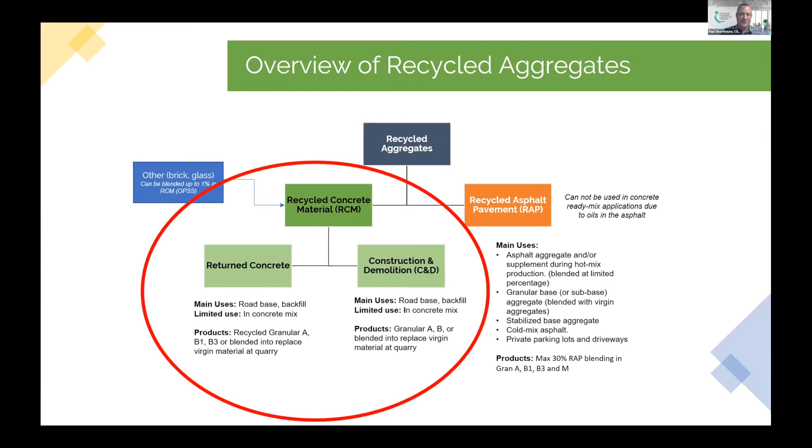When we think about road construction, it's really important to consider the various layers and how much recycled aggregate materials can be incorporated into those layers. In particular, the base and sub-base layers is where we're at for the discussion today. The question we'd really like to pose is, can today's standards and specifications potentially go further and incorporate greater amounts of recycled concrete materials than what's being allowed today? We'll dig into that a bit through the discussions.

So what are the benefits for adopting greater use of recycled concrete material, and why should we care? I think three main areas: availability, cost, and environmental. With respect to availability, we're seeing growing demand for recycling and recovering valuable resources instead of landfilling them. Recycled concrete can be readily available based on construction demolition activities in urban centers or other locations. Secondly, around cost, the opportunity exists to get supplies of recycled concrete at lower cost than virgin sources, given shorter transportation in more urban centers. But of course, this varies a little by location or supply.

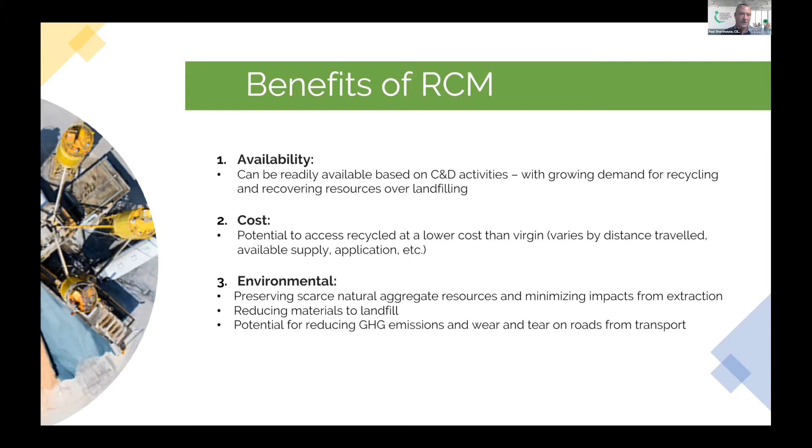And thirdly, the environmental benefits: preserving natural aggregate supplies and reducing impacts from virgin resource extraction, reducing the materials going to landfill, and potentially reducing greenhouse gas emissions based on shorter transportation and processing considerations.

So challenges and risks. It's good to keep in mind the factors that must be front of mind as we think about how to maximize the amount of recycled concrete in use. First of all, quality and consistency: contamination and deleterious materials can create environmental or performance related challenges. On the performance side, over time, strength when using older recycled concrete aggregates on projects could be an issue, and durability over a longer period is an important consideration, with factors like freeze-thaw resistance or drying and wet cycles over time.

Availability and cost, which I touched on as a benefit, can also be a challenge to manage. The availability and the distance traveled affect cost. Recycled materials may not be available in less urban centers, so there's a geographic consideration there. And the prescriptive nature of standards is also something to consider—prescriptive specifications can create issues with maximizing use, which we'll hear more about today from Joanne. Really, the alternative is more outcome or performance-based standards.

There's also a lack of consistent approaches. The lack of harmonized approaches across local governments or across regions can make it challenging for industry to invest in infrastructure and provide consistent supply when demand is somewhat unreliable. And lastly, the perceived risk or business-as-usual mentality is something to think about—a lack of familiarity with using or specifying recycled aggregate in projects, or a previously negative experience, might keep people from wanting to use it in the future. So it's those behavioral shifts to think about as we look at maximizing opportunities for recycled aggregate use.

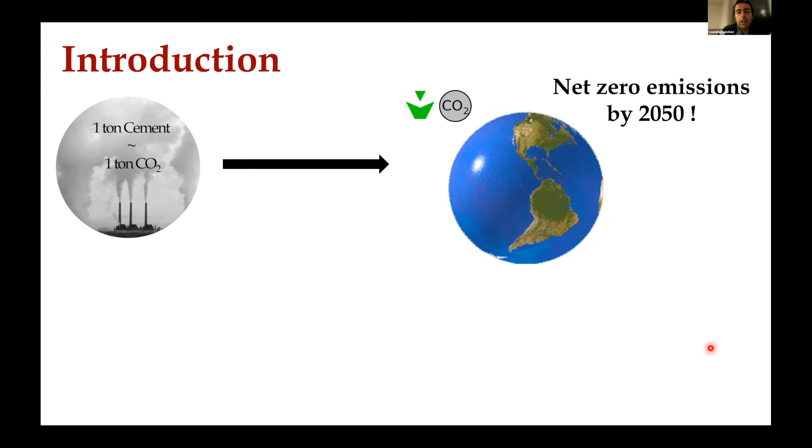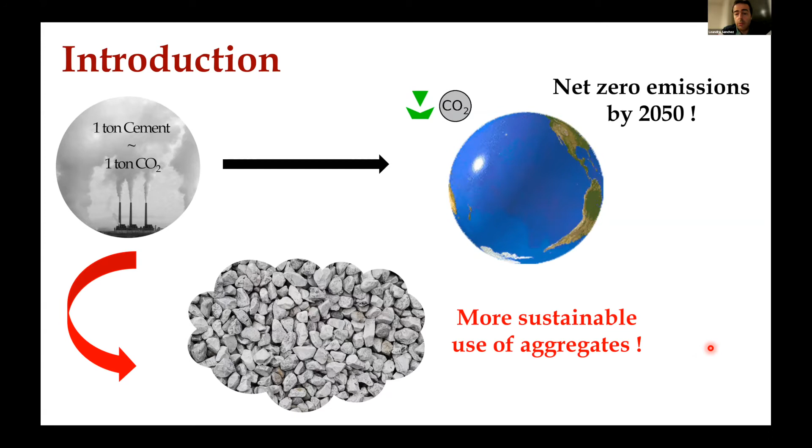Everybody knows that we need to decrease the carbon footprint of construction. Quick background: in the cement and concrete industry, which is where I work the most, one of the techniques to try to decrease cement use, we have a target of net zero emissions by 2050. So we need to accommodate our work to be more sustainable. One way of doing that is through the use of more sustainable aggregates, and that often means the use of recycled concrete aggregates.

The use of recycled concrete aggregates, as Paul mentioned, may reduce the use of virgin aggregate, which is probably a less pressing issue in Canada compared to here in Europe. But over time, we see more and more of our natural aggregates being depleted. Also, the use of recycled concrete aggregates could reduce the impact of aggregate transportation as well.

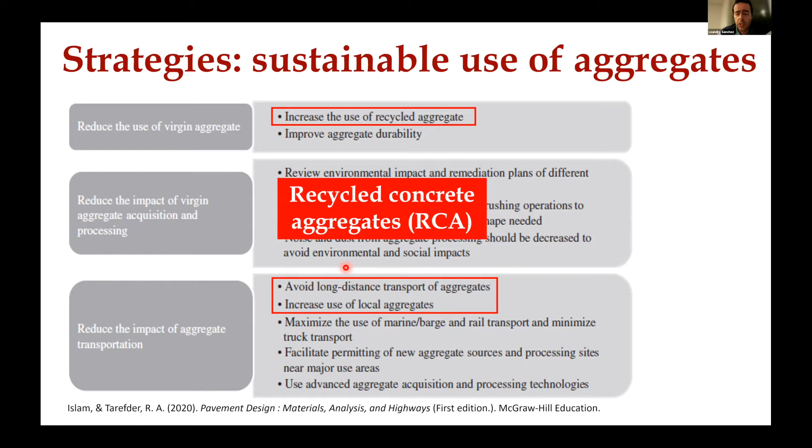So it's very important for us to start acknowledging and studying deeper the features of this material, to be able to use it in different applications in construction. Paul already mentioned a little bit about it, so I'm going to go very fast.

Whenever we talk about recycled concrete aggregates, we cannot think that all RCA is the same kind of animal. We have majoritarily two types: the so-called construction demolition waste, and return concrete. Construction demolition waste is much more heterogeneous, we may have different materials embedded such as ceramics, plastic, and things like that. Whereas return concrete is pretty much pure concrete that for some reason does not meet criteria in the field and returns to the concrete unit to be further crushed and reused.

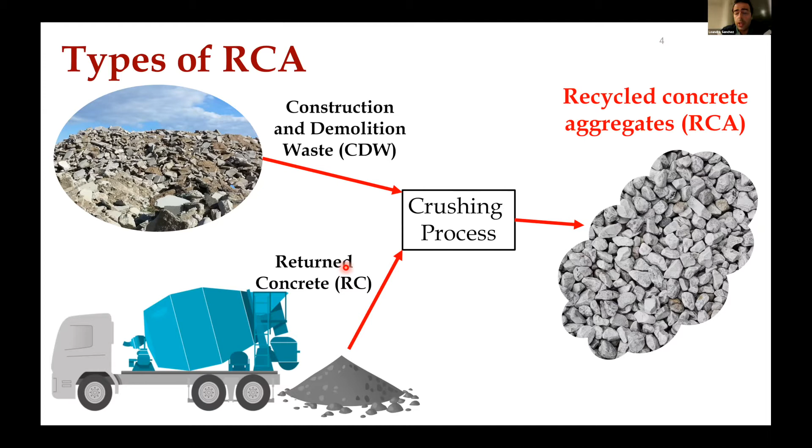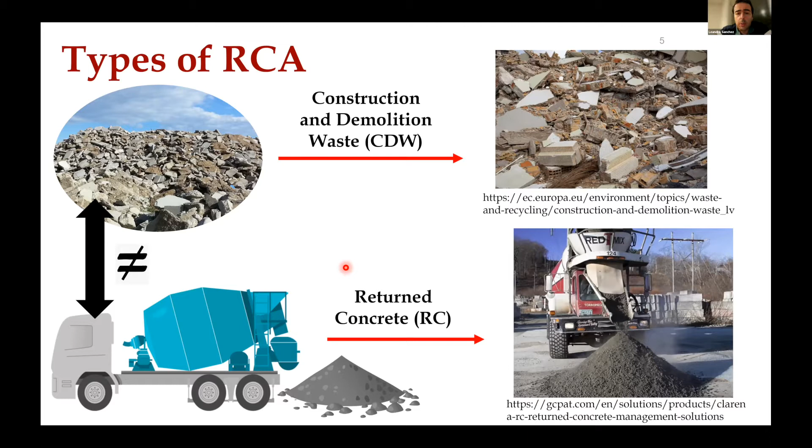But they are very different from one another, and we need to understand the features of these two materials in order to apply them in the field. So if we look a little bit at what our neighbors are doing in the US...

65% of RCA is pretty much used as aggregate in base and sub-base of roads, and only 6.5% is used in new concrete.

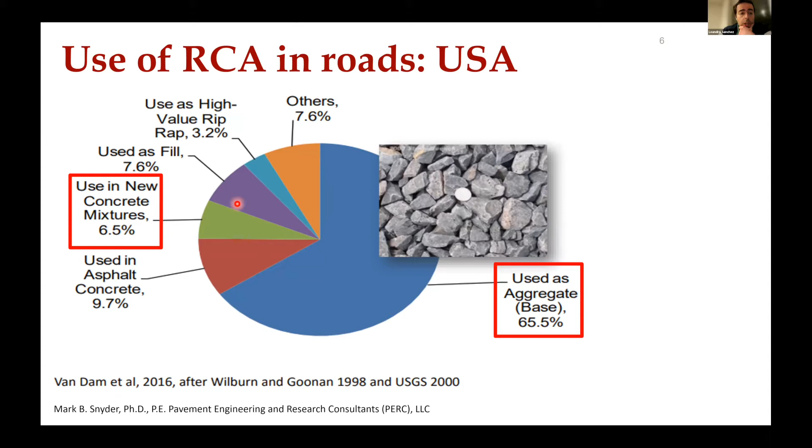If we look at the Canadian perspective, and I'm going to go very quickly here because we'll have other colleagues addressing this part much better than I do, RCA is currently used for roads, but not that much, I would say. We can improve it quite a lot.

30 to 50% of asphalt debris are allowed in new base materials. For construction demolition waste, we always need to check the potential for materials within that CDW that may harm the concrete or asphalt, so that they might be rejected.

But what I would say is the most important feature that should be understood, so that we use this material with an interesting engineering perspective, is the unique microstructure of RCA.

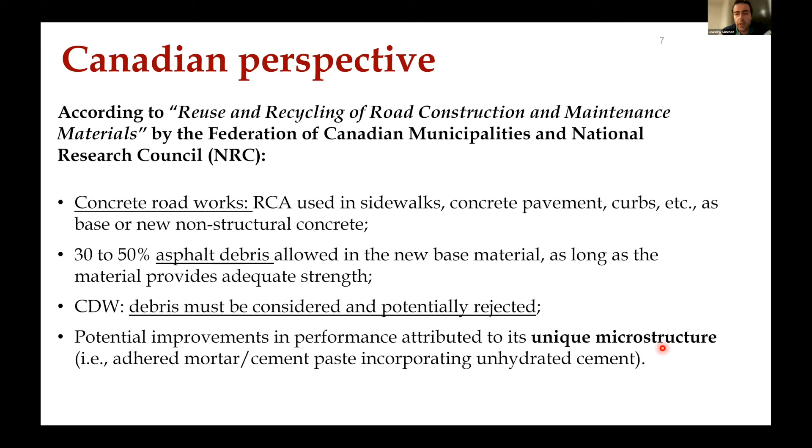If we do a quick look at the microstructure of RCA, you're going to see that we don't simply have an original virgin aggregate. We have a composition of original virgin aggregate and adherent cement paste or mortar, depending on whether it's a coarse or fine aggregate.

If you look at this figure, you may see that all the particles highlighted in red on the left and in yellow on the right - I would say that at least 30 to 50% of those particles are not composed of aggregate. They are actually cement paste or mortar.

And this should be accounted for, because if it's not accounted for, either in the testing of the aggregate itself or in its usage in a new mixture, in a concrete mixture for example, we are going to have issues. So I'm going to show, especially in my case because my research is in this area, the usage of this material in concrete.

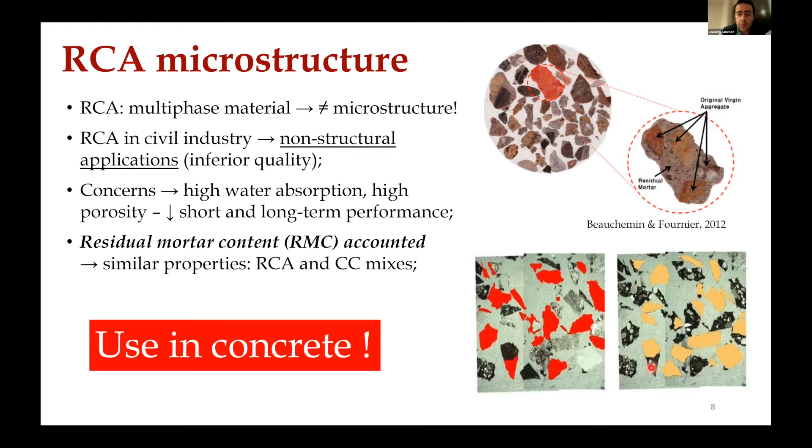So normally what people do is replace aggregates in concrete using a mix design called the direct replacement method, or DRM. They replace conventional or natural aggregates with recycled concrete aggregate, either in mass or volume.

What is the problem with that? If you compare a companion conventional concrete designed with natural aggregates to a recycled concrete, either coarse or fine recycled concrete aggregate, you'll find the recycled mix has much less aggregate and a much higher amount of cement paste, because we're not accounting for the adhered mortar or cement paste. With these mismatched volumes, we normally end up with lower performance.

If you go through papers, reports, and past experience, you'll see that many people qualify recycled concrete aggregates as an inferior material compared to natural aggregates. But I've been discussing this with a colleague of mine from the National Research Council, Dr. Reza Fatifazo, and he has a nice way of putting it. He says, well, it has been good at some point because it has been used, and now it's no longer good, right? So what we probably need is to find a way of better using this material.

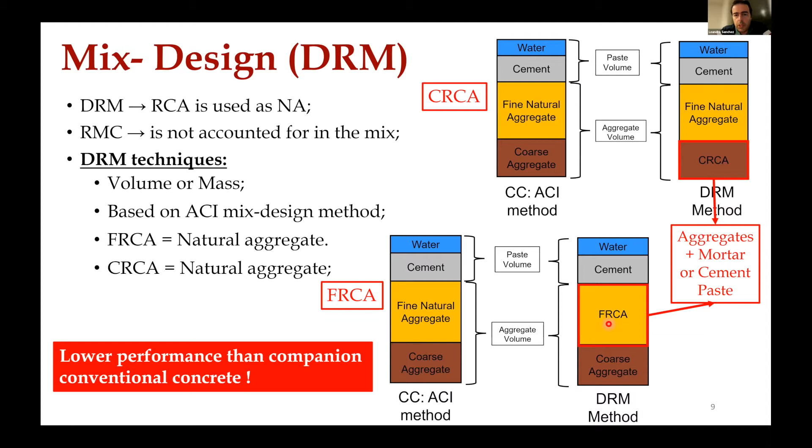Following the work developed at NRC in the early 2000s, a new method of mix proportioning, the equivalent mortar volume method, was developed. At the University of Ottawa, I'd say we upgraded this method with the help of NRC colleagues to develop concrete mixtures with a better fresh state using 100% recycled concrete aggregate.

Following that idea, we measured the residual mortar or residual cement paste in either coarse or fine aggregate particles, and we factored that into the new mix proportioning of the recycled concrete. So we essentially matched the volumes of the recycled mix, in terms of cement paste and aggregate amount, to the conventional mix.

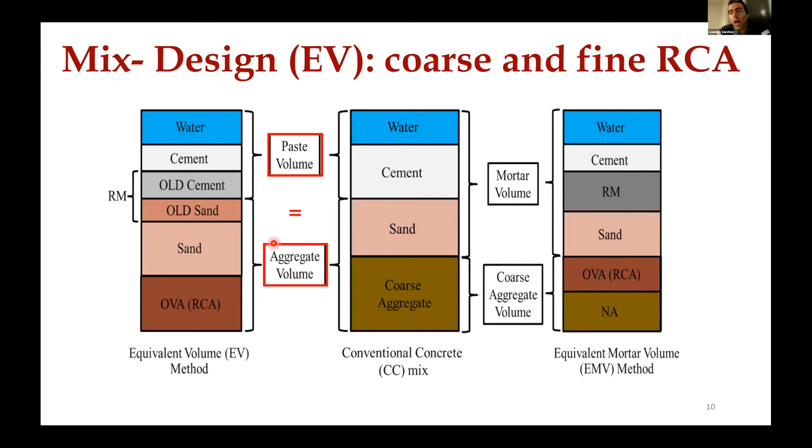I'd like to share a couple of results from this research. First, we were very interested in studying the influence of the source and quality of aggregate on the performance of recycled concrete mixtures. So we used two different types of aggregate: a stiff aggregate, quartzite, compared to a non-stiff aggregate, limestone.

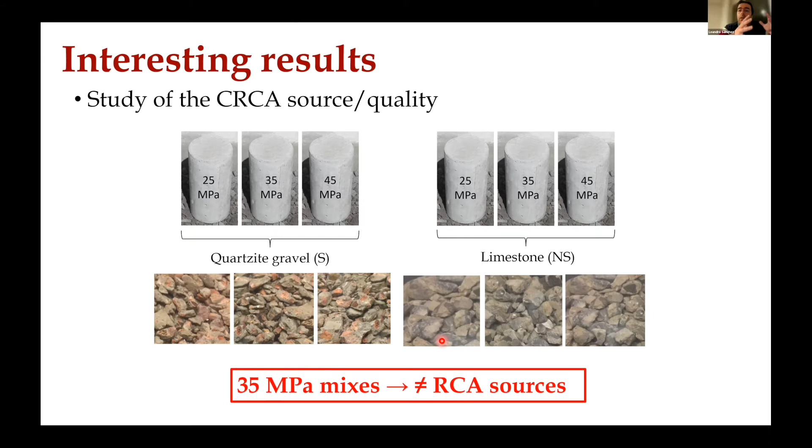We fabricated conventional concrete at 25, 35, and 45 megapascals made of these two aggregates, moist cured the materials for 28 days, and then crushed all of them. This gave us six different types of recycled concrete aggregates. We then used the EMV method, developed in collaboration with NRC, to proportion 35 megapascal concrete made with these different inner qualities of RCA.

The first thing we did was measure the residual mortar adhered to the particles. It's very interesting to see that the higher the strength of the material, the higher the residual mortar attached, especially in the case of the limestone. The values were very high, ranging from about 34-35% up to 52%. So imagine that a third to half of the particle is not composed of natural aggregate at all -- physically, the material is completely different and should be treated differently.

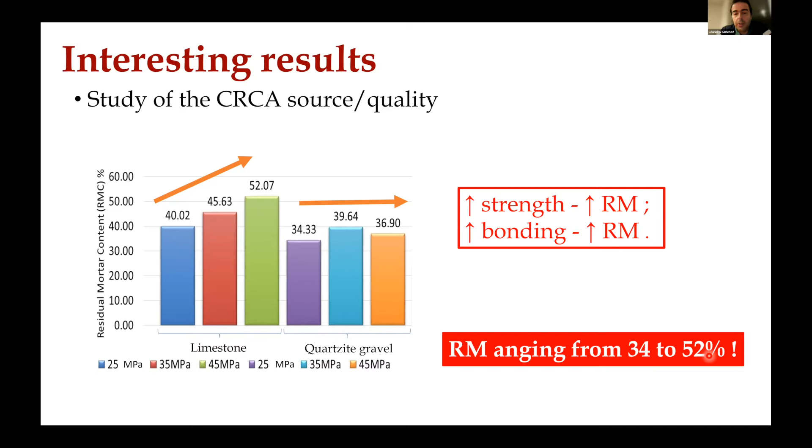Using the new mix proportioning technique we proposed, whatever the inner quality of the material received, as long as we matched the volumes of aggregate and cement paste, we were able to proportion concrete mixtures with compressive strengths above and beyond the 35 megapascal target set at the beginning of the project.

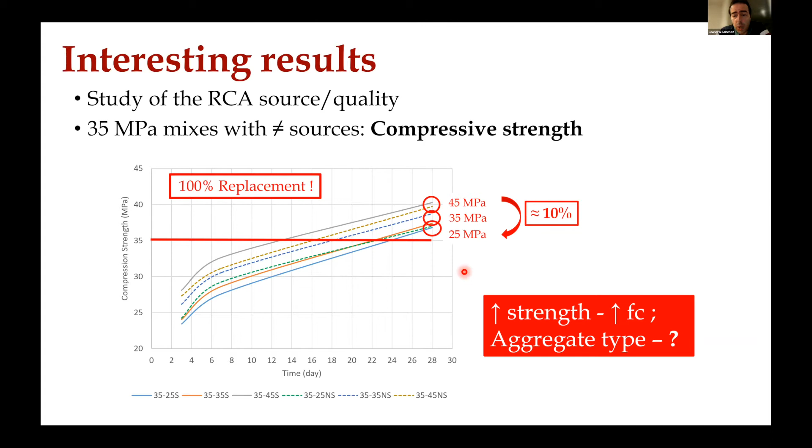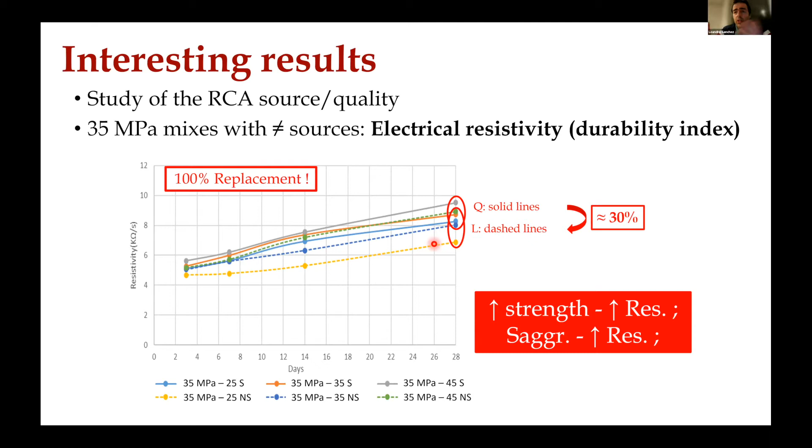We were also trying to understand a bit more about durability. I currently have a large project on this with a PhD student, but in this quick project, we tested electrical resistivity on those mixtures and verified that they yielded quite good results compared to conventional concrete. So it was very promising, using mixtures designed with matching volumes to the companion conventional concrete.

A more scientific approach is called the particle packing model. The green curves demonstrate the matching volumetric approach as previously mentioned, whereas the dark curves demonstrate the direct replacement, and the blue ones the particle packing—or actually vice versa, the green ones the particle packing and the blue ones the EV.

We tested freeze-thaw resistance of those, performed at NRC. If we compare that, we can see that with the same inner quality of the RCA we received, as long as you mix proportion your concrete properly, you're going to have proper performance—a residual dynamic modulus higher than 60% compared to the initial state, so the loss is lower than 40%. However, if you simply directly replace that in concrete, your material is going to fail over time, because you're not accounting for the higher porosity, higher absorption, and different microstructure of the particles.

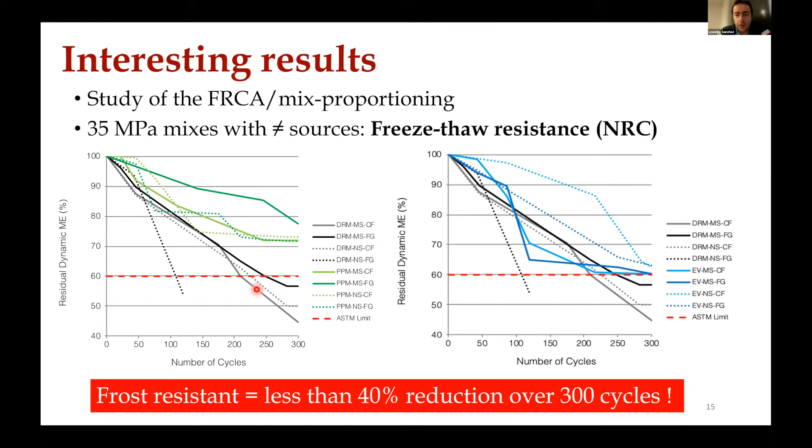I'd like to finish by saying that I've been working at EMPA here in Switzerland, sharing experiences in the usage of RCA. They use much more RCA than we do in North America. If they use up to 25% of RCA in concrete mixes, they don't even consider it a recycled mix—they consider it conventional concrete. In Zurich, for example, people are almost obliged to incorporate recycled concrete aggregate; they can do up to 50% for even structural applications. So I think it's a matter of time before we need to do that more and more worldwide, and I think the opportunities are there.

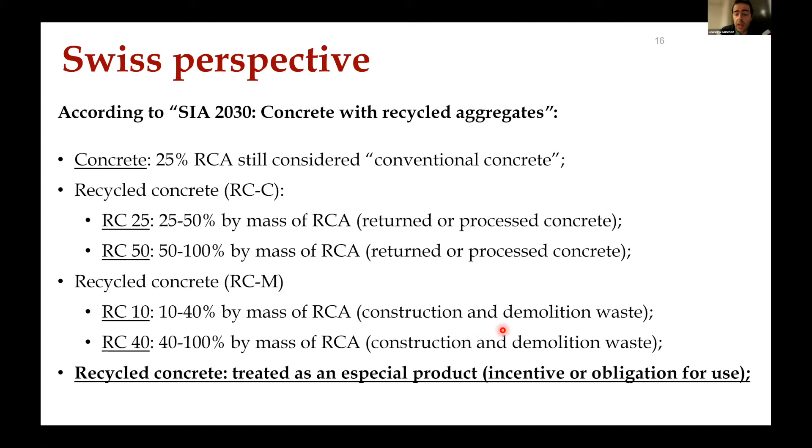One of the things they are doing a lot here as well is carbonating the aggregates to enhance performance, and the results are very promising too. Nevertheless, this is something they're doing with both returned concrete and construction demolition waste.

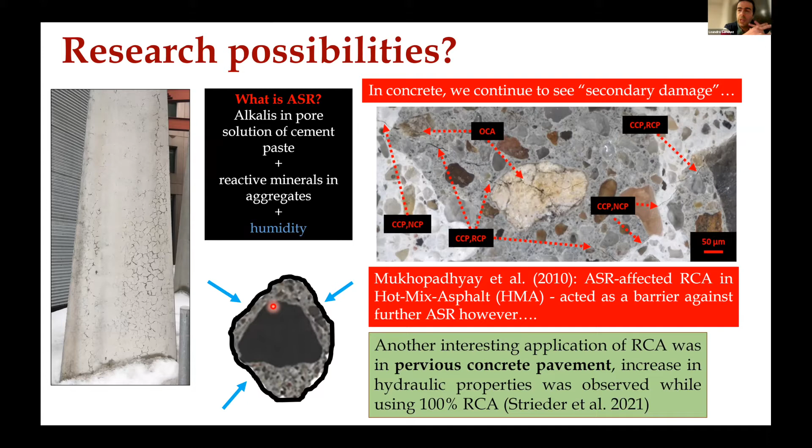Finally, I recently discussed with a colleague from ACI—this researcher, since most of my research is with the use of RCA in concrete—and for roads, people may think most of our roads are made of asphalt, so how can we transition that use not necessarily on the base and sub-base? This colleague used recycled concrete aggregate from previously deteriorated RCA. In Canada, we have lots of deterioration due to alkali-silica or alkali-aggregate reaction, and this aggregate, normally no longer used in concrete because of a potential deleterious secondary reaction, had been used in hot mix asphalt. Apparently, whenever used in hot mix asphalt, it yielded very good results, and further deterioration has not been observed. So this might be a potential hot topic for further study in the future with the use of previously deteriorated recycled material in new asphalt. That's pretty much my presentation.

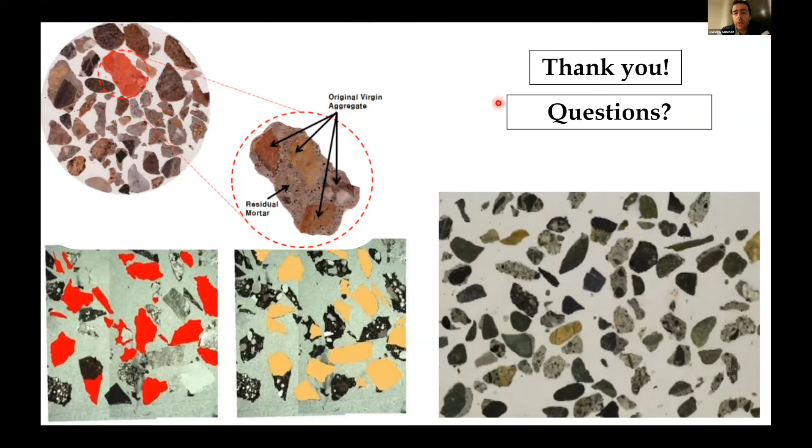That's great, thank you Leandro, for the overview and for getting into some of the technical considerations that I'm sure our engineering audience will appreciate. A couple of comments and questions came into the chat box so far—a question from Rob about how to define lower performance. You mentioned that earlier in your presentation, Leandro. Do you have any perspective to share on the scale of performance?

Sure. Normally the first thing people think about is strength, but strength is no longer a big deal for RCA—we can get whatever strength we want. However, if you don't match the ingredients volumetrically, as I mentioned before, you need to use lots of cement to achieve the workability and strength required for most projects, which makes no sense with the use of RCA, because we're trying to decrease the carbon footprint, not increase the amount of cement. So the short answer is that civil engineers normally think first about strength, but when you're able to match volumetrically, we can enhance performance beyond strength to include nice workability and much better durability—meaning freeze-thaw performance and performance against different durability mechanisms.

Thank you everybody. The title of the presentation is, as you can see, towards sustainable construction industry, as part of the stakeholder workshop. My name has been mentioned, Omran Maadani, and my colleagues Mohammed and Juan are joining me as well. Second slide, Mohammed, I guess.

Canada is currently using aggregate faster than it is being made available, resulting in an aggregate shortage. There is a critical shortage of natural aggregate and an increasing amount of demolished concrete - concrete accounted for almost 150 million tons every year as waste. The current usage of aggregate is not sustainable, and as demonstrated by the growing shortage of natural aggregate in urban roads, recycling concrete from deteriorated concrete structures would reduce the negative impact on the environment and increase sustainability of aggregate resources.

There are several barriers to overcome in order for RCA to become widely accepted. Initially, there is a high investment in the cost of purchasing concrete crushers, in addition to maintaining those crushers. So there are still many unanswered questions regarding the RCA characteristics and durability, and long-term performance on the beneficial use of RCA and RAB in concrete and pavements respectively.

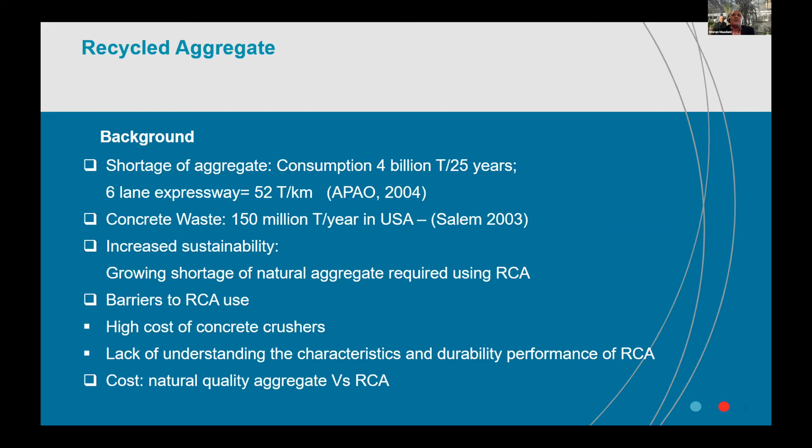Construction and demolishing waste makes up a large portion of all generated solid waste, such as RCA and RAP.

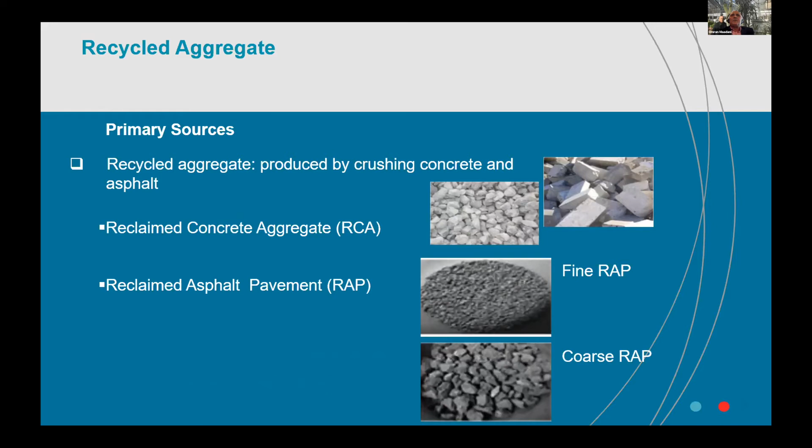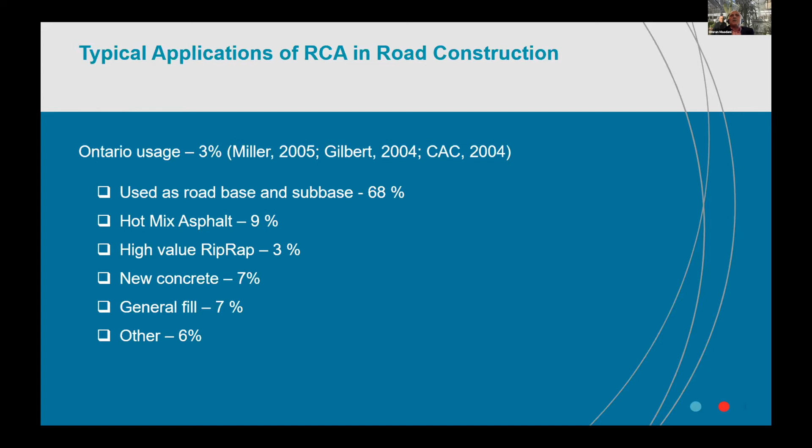RCA can be used in concrete. There is a CSA and standard ACI mix design procedures to control the fresh and hardened properties. In the same way, RCA is used in HMA according to OPSS 1003, and unbound materials according to OPSS 1010, to evaluate different properties.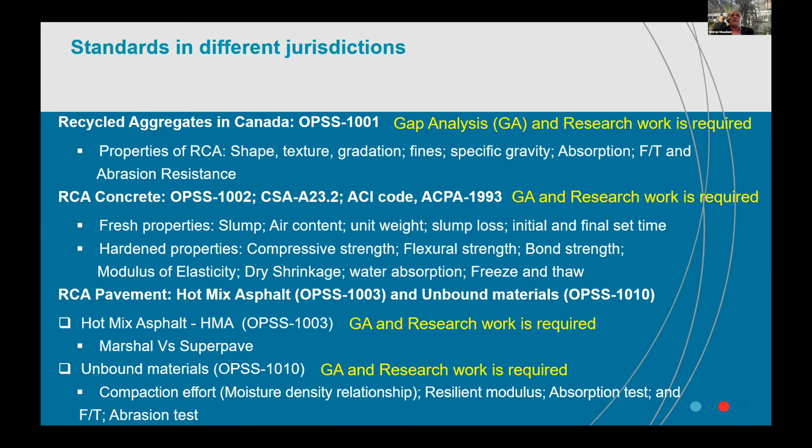Same things here, optimization of concrete mixtures. We need to do some gap analysis and research work to extend the limitations set by some standards.

Both CSA and ACPA allow use of RCA as long as the resulting product meets its performance standards. Both CSA and ACPA criteria were used as guidelines for optimizing the concrete mixture to improve both fresh and hardened concrete properties.

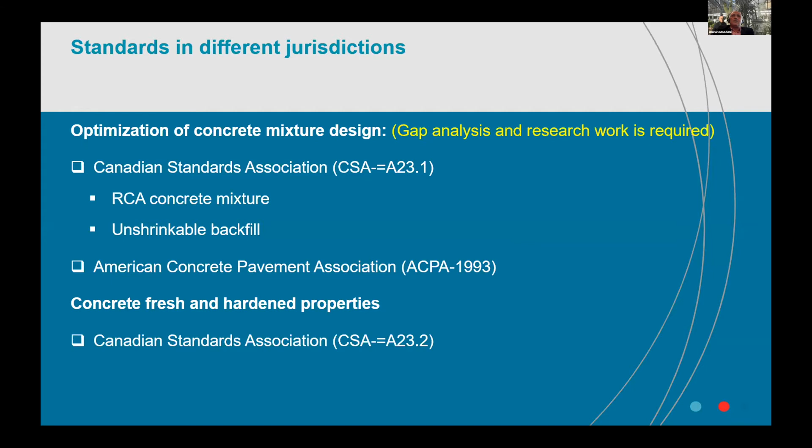First, using RCA in concrete, the Canadian Standards Association addresses RCA very loosely due to ambiguous characterizations of the product in the national, provincial, and municipal material standards and building codes, all imposing severe restrictions on using RCA. For instance, 75% of all concrete used globally is non-structural, which begs the question, why are we using structural grade aggregates to produce non-structural concrete? I believe research work is needed to support these changes.

Also, OPSS indicates some limitations using RCA and RAP in some materials. For instance, granular material O and granular material 2 have some limitations that can be increased with doing some research work.

Also, one of the performance parameters is the Los Angeles abrasion test, and there are limitations there. This can be better evaluated to see how we can increase the limitations with having good quality RCA being adopted and used in concrete or roads.

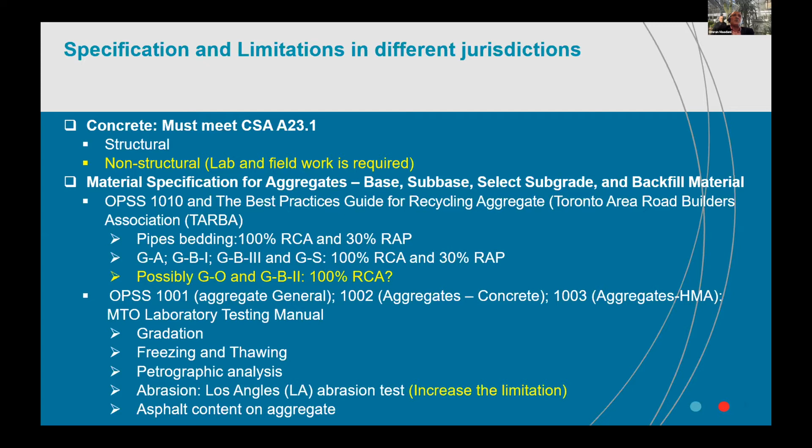There are some practices being used now. For instance, the best practice guide for recycling aggregate for the Greater Toronto area roughly explains whatever is mentioned in OPSS 1010, covering quality control, production, environmental compliance, and safety issues.

The Ontario Good Roads Association will unveil the reclaimed asphalt best practice guide in spring 2022, with more explanations on how to stockpile RAP, prevent contamination, and manage stockpiling and processing operations.

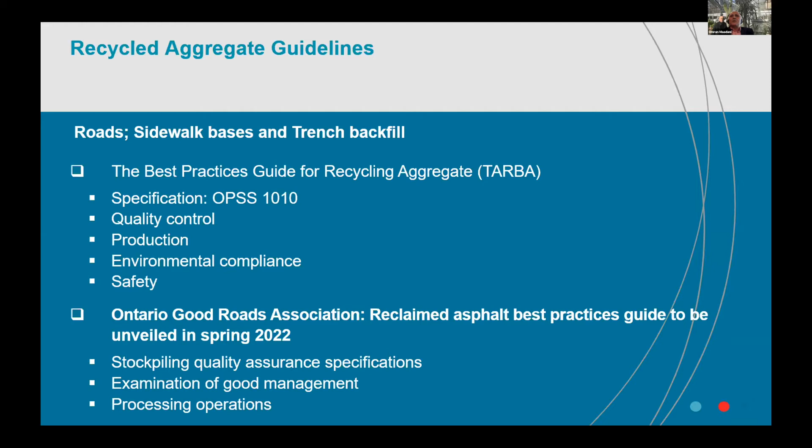In the next few slides, I'll talk about some of the needs for future research. I also thank Leonardo for discussing his ongoing collaboration with NRC on recycled concrete.

I'll start with some highlights from Infra Guide 11, published in 2005 in collaboration between NRC and the Federation of Canadian Municipalities. I know most of you are already familiar with this. So, some of the lessons learned from this guideline.

This mentions that use of RAP as a granular base reduces the amount of new granular material required for road construction. However, the value of the asphalt cement in the RAP, which is the binding agent, and the energy invested to produce this, may not be fully exploited if that RAP is only used within the base layer.

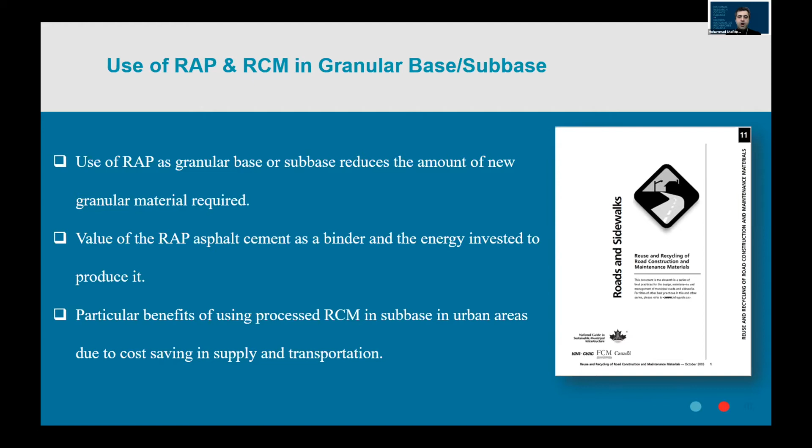However, there are some circumstances that really dictate only using the RAP in the base layer, which we all agree on. Also, there are particular benefits according to this guideline for using processed RCM in subbase, especially in urban areas, because of the cost saving and economic aspects, due to reducing the cost for transportation and supply.

Also, some of the highlights from the NCHRP report 598, which was sponsored by the National Cooperative Highway Research Program in the US, indicated that there are some concerns in unbound layers. They also highlighted some constructability concerns and the validity of the standard tests, which we also discussed during the Q&A session of the previous presentation.

Some of these issues can also be related to properties of the aged asphalt binder, presence of contaminants like soil and mud, which are not usually found in virgin aggregates but are somehow common in recycled aggregates. Also, these materials have been exposed for a long time to different environmental elements such as aging and climatic factors.

As a suggestion from NCHRP report 598, using accelerated pavement testing or in-service testing of pavements is considered two potential research approaches that can help evaluate the potential of these materials, evaluate pavement designs based on these materials, and other performance-related features, which was also brought up during the Q&A a few minutes ago regarding how performance can be measured.

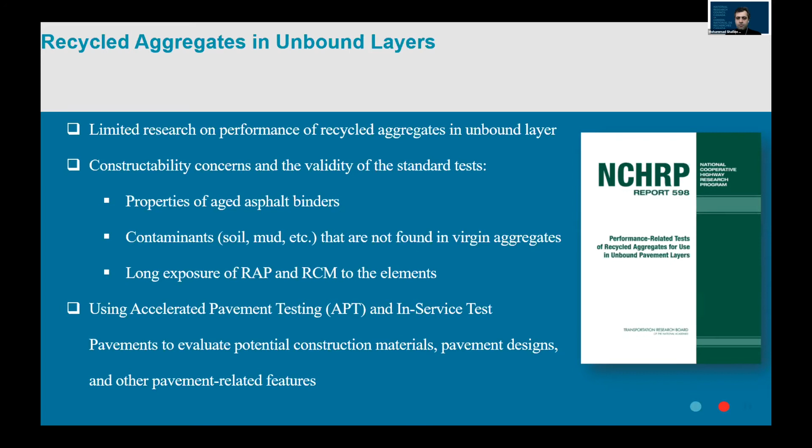If we talk about these two technologies, one being accelerated pavement testing, here you can see the top picture, which is a circular test track in France, and another type of accelerated pavement testing using heavy vehicle simulators, HVS. This one is from the Federal Aviation Administration, again in the US.

Using accelerated testing can provide us with a quick evaluation of both flexible and rigid pavements built with unbound recycled aggregate layers. These technologies can also provide us with the effect of multiple control factors, such as using a specific type of aggregate with specific properties, and how the performance of these unbound layers can be measured with proper visual observation or instrumentation. There are some shortcomings of APT, which probably is known to everyone.

It's the long-term evaluation, because the long-term impacts of freeze and thaw during multiple years, the strength loss associated with these long-term impacts may not be fully investigated using APT technologies.

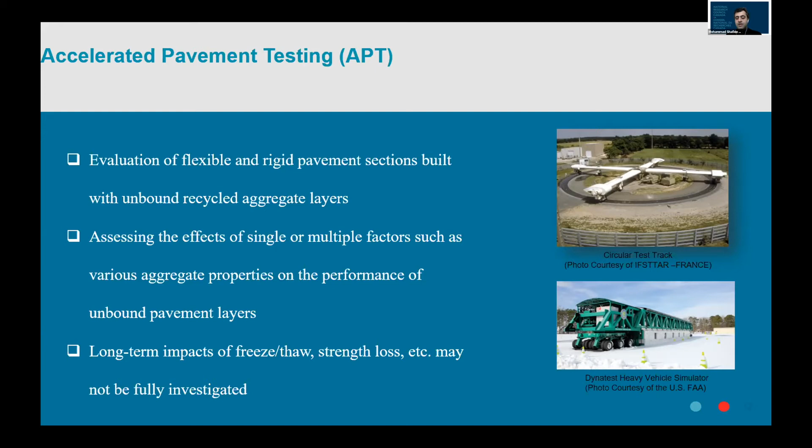However, we all know the value of in-service test pavements. These are full-scale real projects, which are most of the time instrumented with strain gauges, soil compression gauges, earth pressure cells, as well as environmental sensors such as time domain reflectometers, moisture sensors, temperature probes, settlement plates, and so on and so forth.

With this in-service pavement testing, researchers and practitioners can evaluate the actual performance of roads built with recycled aggregates. Especially if you have multiple test sites across the country, we can evaluate how climatic variation can impact the performance of these recycled layers.

Construction procedures can also be simulated in this way, and that's good for contractors' experience, and also for updating the construction standards and specifications especially.

As I mentioned earlier, instrumentation can be a key tool to give us exact in situ results of how these layers are performing against traffic loads and environmental variation, so that we can have a mechanistic design of pavements using the results of stress, strain, and deformation measured from these gauges.

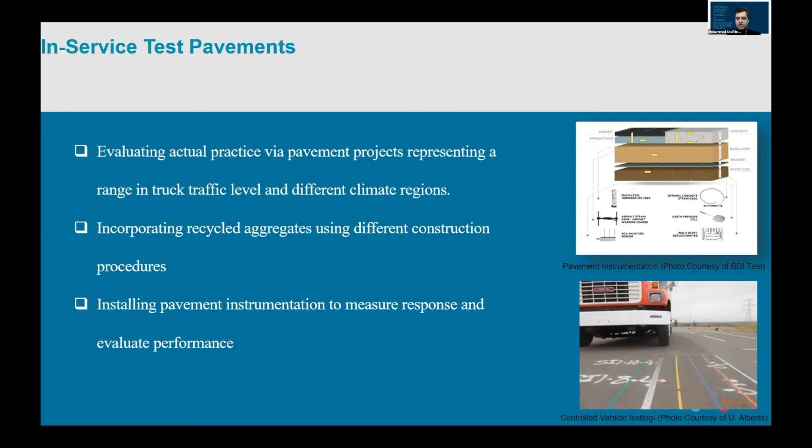Recycled RCA is a readily available, flexible, and sustainable product that has a proven track record as a high-performance material for base, sub-base, and other construction projects. It is also a viable substitute for virgin aggregate and concrete for an increasing number of applications.

We are committed to increasing the use of recycled aggregates by continuously reviewing policies, benchmarking with other municipalities, and conducting research to identify best practices. This ensures that we are upholding and executing environmentally friendly practices.

As Mohammed said, instrumentation will be one part of the work, and that is proven by the literature review, which provides a view of sustainability and key performance indicators. The material properties of RCA and RAP, both as aggregate and in concrete mixtures, HMA, proportioning design with RCA, performance of existing RCA pavements, and implementation of RCA, highlight that RCA has been used successfully and more work needs to be done.

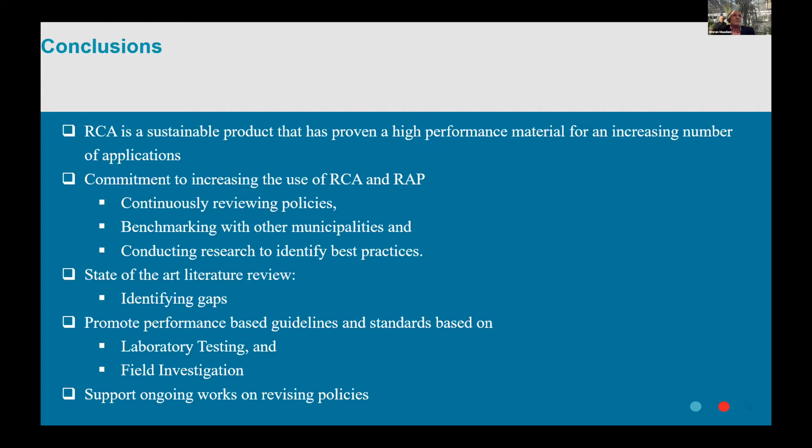Thank you, Mohammed. Thank you, Omran, for providing that overview and sharing the slides around standards, practice, and testing considerations. Had some good questions come in through the chat box. Jo-Anne, do you want to? Yeah, I can help you again navigate some of these.

So this one appears to have come through from someone named Marion, but we know we have several Marions that have come through on that name. It's a simple question, and I think this is kind of the heart of what we're getting into in the latter part of today's workshop, which is the certifications and standardization of this practice. So the simple question is: is there a certification right now for the use of RCA? So if our team at NRC - I know there is some sort of provincial standards that you spoke to very directly in your PowerPoints - but are you seeing any certifications where that's concerned, third party or otherwise?

We at NRC here, we do research work. So we don't certify anything here. We can help, as you said, the industry, how to do things and what can be done, and what is the percentage of RCA, what are the properties that you are expecting if you use this kind of RCA versus virgin aggregate. And yes, we can improve the fresh properties, the hardened properties, but to issue a certificate, no, we at NRC are not allowed to do this.

Excellent. So I'm going to take the conversation in a bit of a left turn, and I'm very mindful that we've got a lot of engineers and engineering minds in the workshop today. We're very grateful for the technical discussion we've had thus far, and it's absolutely needed. But where I'm trying to take you in this presentation is the intersection with what currently seems to be sporadic or inconsistent use of recycled aggregate thus far, and entertain this idea of, can we start to standardize it and maybe even certify it, as was suggested in one of the questions today? And then how do we intersect that with more broadly, more sustained and systemic use in public procurement and buying of construction services?

So I'm going to talk a little bit about this, next slide, I'll just get right into it. In terms of why we're doing this and the difference between the linear economy and the circular economy, just to give you a bit of background on how we are consuming differently and what this means, it's really around this idea of maintaining aggregate and materials in general at the highest utility and value at all times. That's the overarching environmental reason we want to do this, and why we're looking for mechanisms to reduce virgin materials with recycled aggregate, and I think we always have to continually bear that in mind.

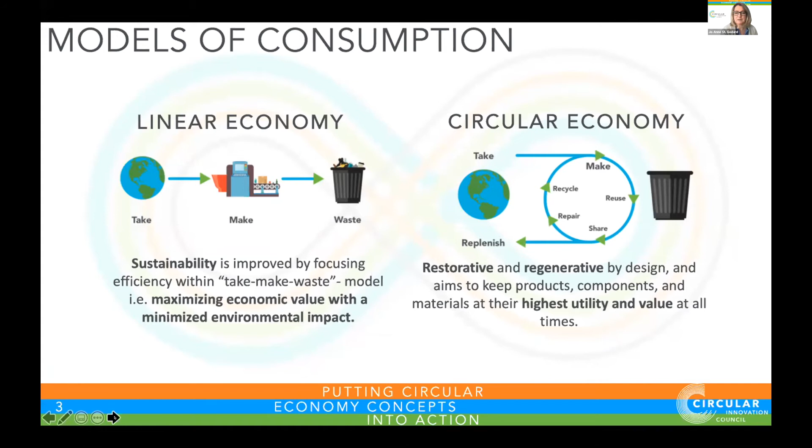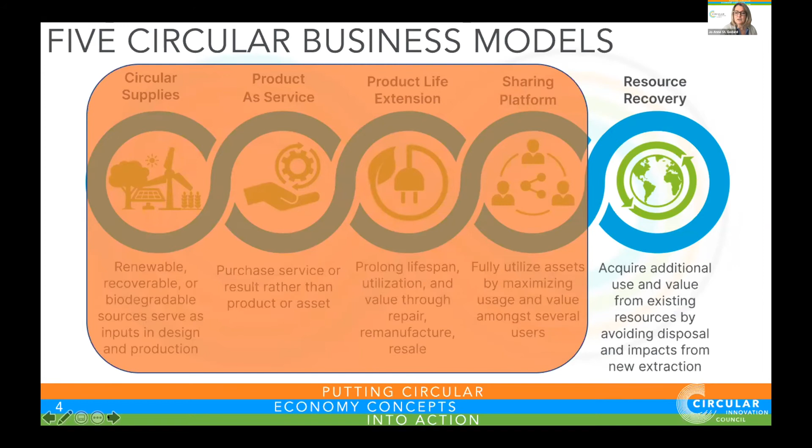And so the circular business model we're trying to employ here is, of course, resource recovery, acquiring additional use and value from existing resources, and of course avoiding disposal by doing that, and most importantly, the impacts that come with new extraction.

So with that in mind, why procurement, and why do we want to switch to circular procurement, and what does that actually mean? The definition of circular procurement is goods and services that are purchased systemically and purposefully to incorporate closed energy and material loops within value and supply chains, to reduce waste and other environmental impacts. And a call out was already made today by, I believe, Dr. Sanchez, about the importance and connection to low carbon building.

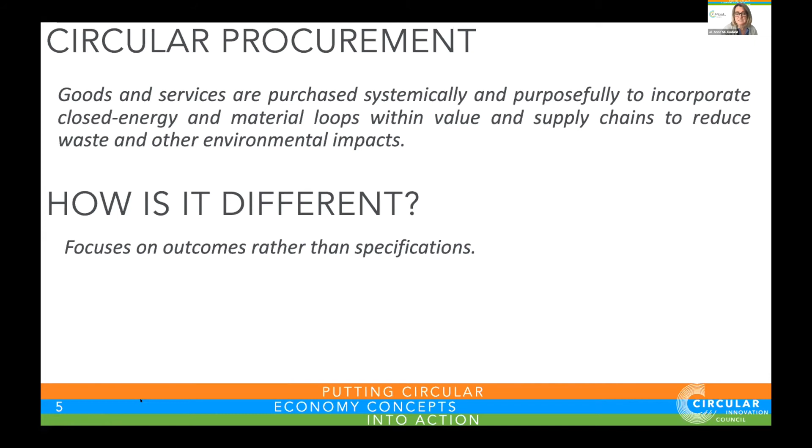And so how is circular procurement different from regular procurement? Well, it's really in focusing on outcomes rather than specifications, a departure from what's been really a specification-based conversation thus far today. But why are we focusing on public procurement in particular, and picking on governments as it relates to this opportunity? It's really because there's enormous buying power that rests with governments, and you can't have circular supplies if you don't have circular buyers.

And so when we look at the value of public procurement in the Canadian context, it actually represents now more than 15% of our total GDP, with a current value of $200 billion. So when you think about starting to make this a common practice by standardizing it across the country, and really shifting the market to prefer recycled aggregate or maximize its use, the government procurement purse has an enormous opportunity, coupled with social public policy commitments and agendas around carbon emissions, waste reduction, and supporting local business and local economic growth.

So often these practices don't get tied into the broader commitments of governments. In particular, now we're seeing municipalities make them on a community-based level. So when we talk about the influences of public procurement, certainly the direct spending on goods and services, but their ability to enable market transitions to stimulate the economy in a certain direction is often untapped or underutilized. They also are funders or influencers of other organizations, in particular where we have private and public entities working towards a common good. And so their role in advancing best practices and developing those markets and training and employment, and you can see the interest with NRC and the influences and investments being made at their level, is really, really important.

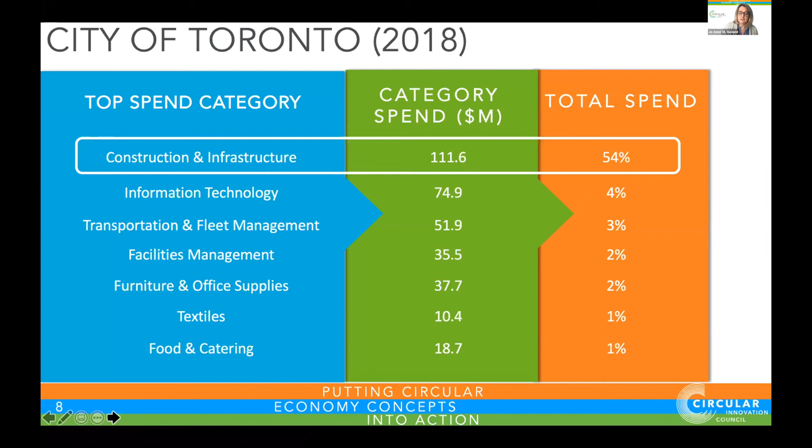And so going back to that common theme of market influences - Paul touched on this in his opening, talking about why do we do this? Who cares? What are the benefits of moving to maximize the use of recycled aggregates? I think we've touched often enough on the environmental benefits, but when you look at the economic side and the social side, those are often not voiced or recognized. On the economic side, we talked about reduced costs, using local employment by utilizing local material as opposed to sourcing virgin material, and the innovations that are stimulated from that.

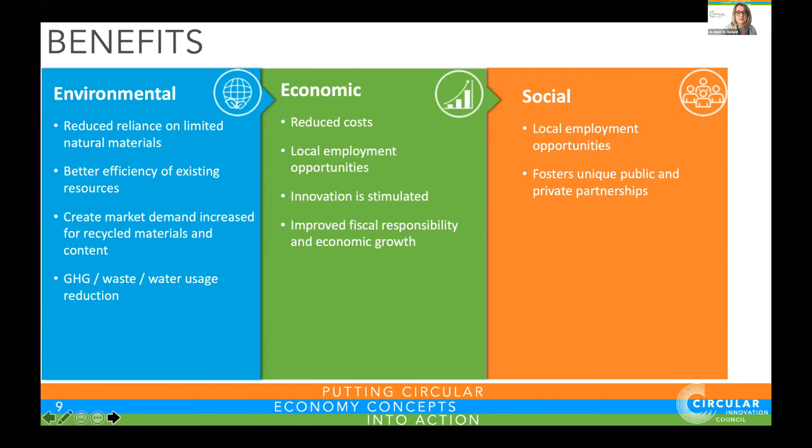And then improved fiscal responsibility and economic growth. So really, this is material that we want to use on site, and we don't want to be transporting it from faraway places. And so the economic benefits that come from that application, and then the local employment opportunities and those important public and private partnerships that are really at the heart of innovations.

I wanted to have a placeholder for this slide in particular, because I don't think there's enough connectivity here around the opportunity to maximize recycled aggregate and its ability to actually provide this low carbon solution. Often when we think about carbon emissions or GHG, we think of out-of-pipe, or we think of building emissions, but we know that in order for us to hit the targets that we've all committed to in Canada, or even at a local level, we need to get at the embedded carbon that is part of the goods and services, and in particular construction.

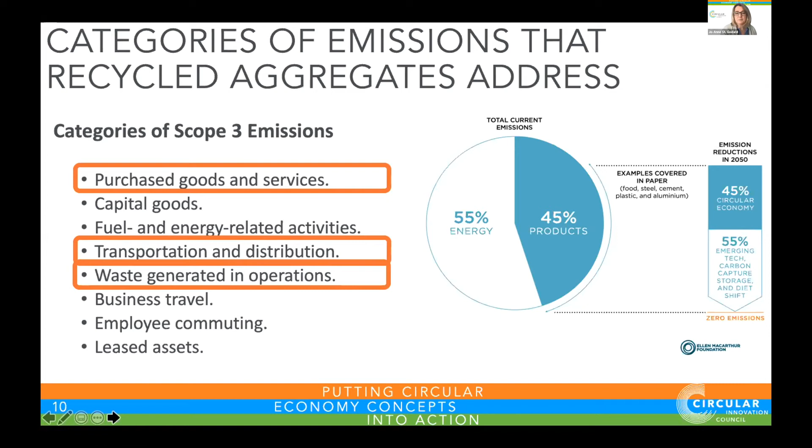So when we think about scope 3, or embedded carbon, we can see that there are three real direct abilities here through the purchasing of recycled aggregate or its reuse: the transportation that would be reduced, the distribution by looking at local applications, and then of course avoiding the waste generated. And so I think what we want to do, in addition to trying to standardize and maximize this use, is actually track it. We've already stated that there's a need for better data, better reporting, and certainly as it relates to maximizing recycled aggregate, then accounting for that in our carbon emission reduction targets is going to be really important.

So I think what we want to talk about, and again it's been touched on several times in previous presentations today, is this idea of moving from a prescription or specifications to more outcomes-based.

We've talked about the need for recognizing that the recipe changes as it relates to mixing in recycled aggregate. But really what we're trying to drive here is a certain outcome to minimize our risks, meet quality control issues, and level the playing field for procurers and suppliers alike around driving outcomes, low waste, low carbon, and of course meeting the specs that are required.

We want to look at standardizing testing and reducing those barriers that are driven through a common standard, and by doing so improve compliance and increased usage.

So I think the industry is prepared to meet the specifications, but need the flexibility to deal with the local variations that have been discussed again in the conversations today, and the ability for a more outcomes-based standard to do that.

So really the questions are: how can we connect these discussions around specs and standards to more use in procurement? What is the role, or what might be the role, of national standards on recycled aggregate in maximizing the public procurement opportunity? How do we actually have the engineering functions connect better with, or more directly with, the public procurement functions of governments, in particular municipalities, in order to move the markets in this direction?

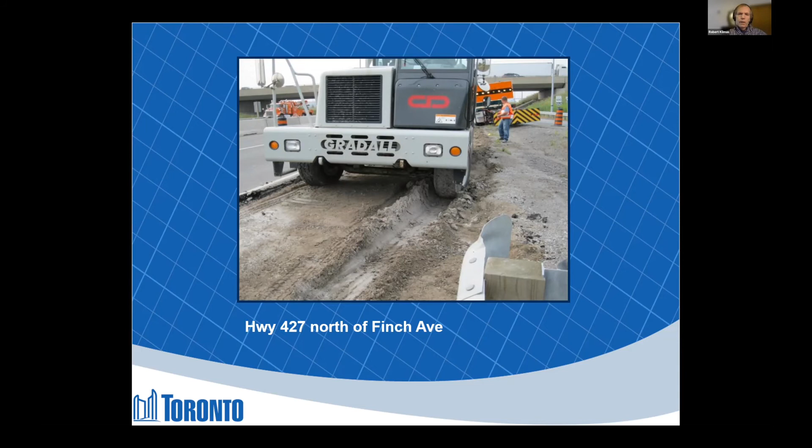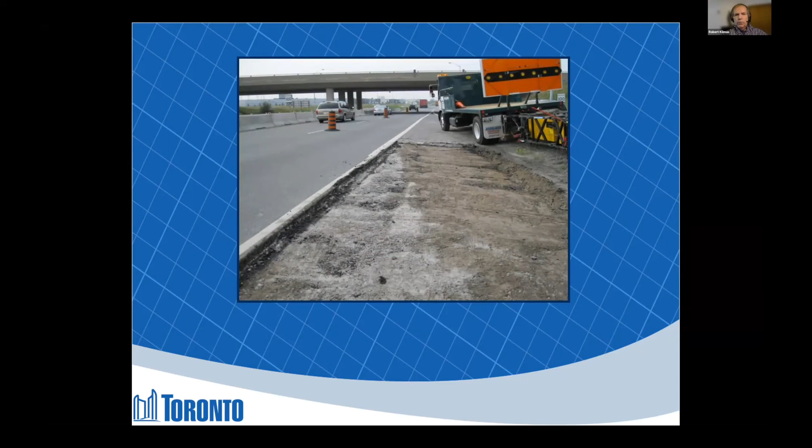And so while they were removing the shoulder, they noticed that the pavement was starting to heave. Next slide.

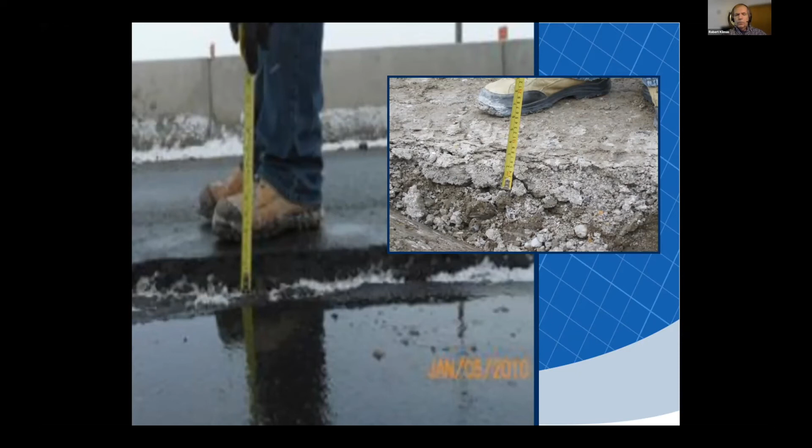So when the granular is mixed in with gypsum drywall, it starts to heave, but not like our regular freeze-thaw cycles where pavement rises and goes back down. If there's gypsum in there, it starts heaving and just continuously keeps heaving. So what they had to do on the 427 was actually grind that all off and put in a whole new subbase and pavement. That's where all that media hype about RCM not being good came from.

So there's 3 sources: RCM Class 1, which is kind of like concrete from runways, rejected pipes. Class 2 is non-structural stuff like sidewalks, curbs, and gutters. And Class 3 is construction and demolition waste from buildings and cinder blocks.

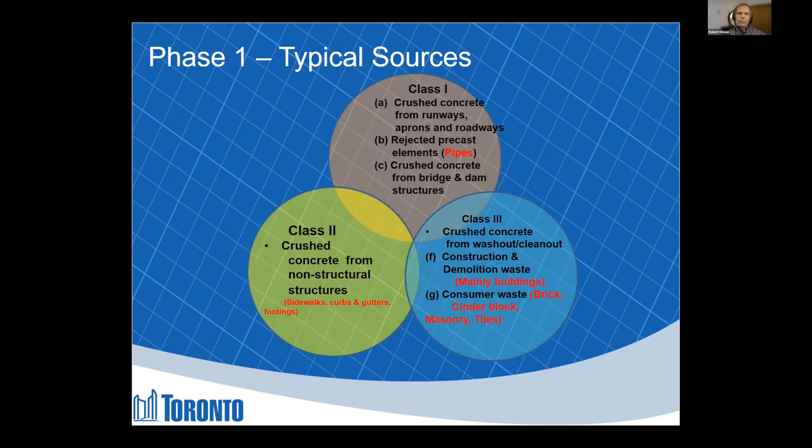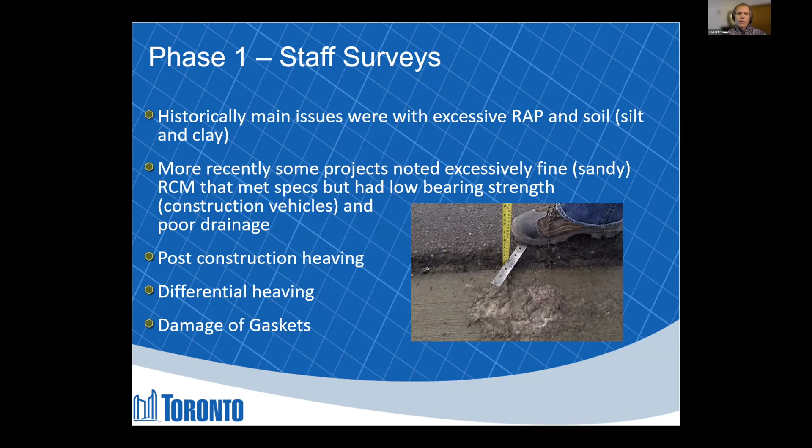Next slide. So we did staff surveys, and the typical comments were about excessive RAP and soil - they were silty. We noticed that some of the RCM was fine, there was a lot of fine sandy silt with low bearing strength. We noticed on one project there was post-construction heaving, differential heaving, and people thought maybe the RAP would affect the gaskets in the PVC pipe.

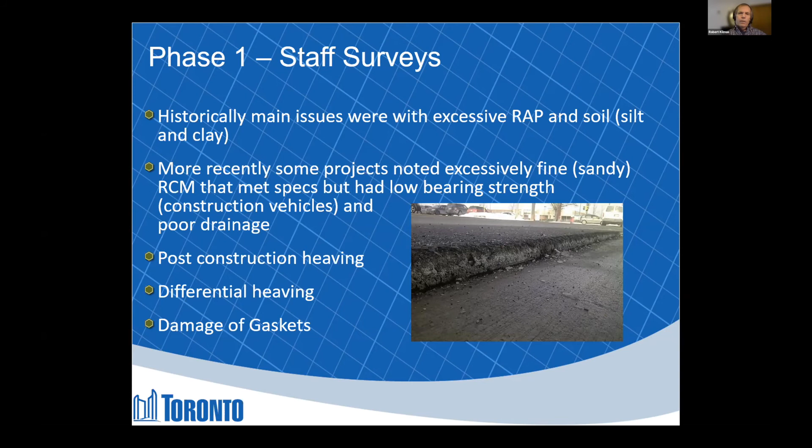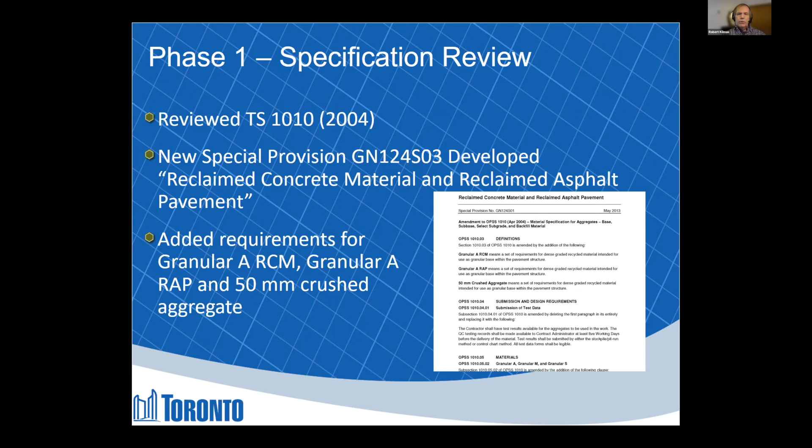Next slide. So for the specification review, with granular A we allowed up to 100% RCM, and we also have what we call granular A RAP, where we allow up to 30% RAP. We also don't allow any glass or ceramic material.

And then deleterious material max 0.5% - I think the OPS is 1% max, we narrowed it down to 0.5. And we added that no gypsum plasterboard wallboard mix could be used.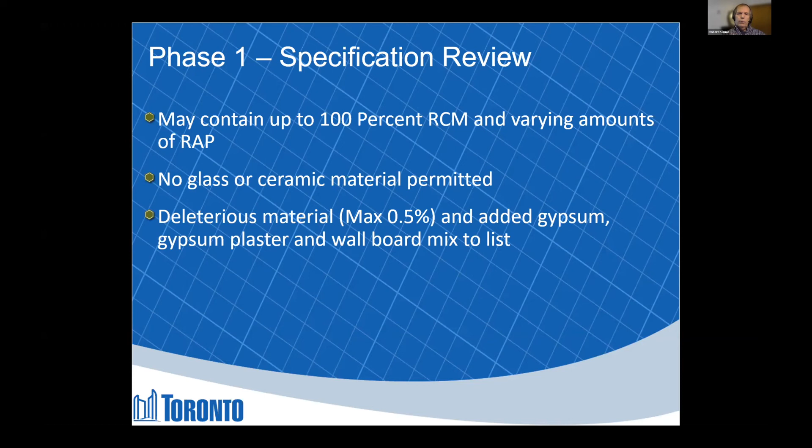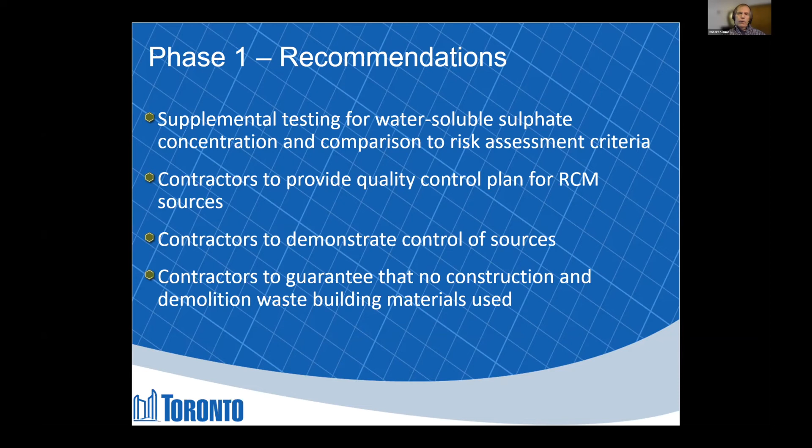The recommendations from the study were: we're doing testing for water-soluble sulfate concentration to see if there's any gypsum. We want the contractors to provide a quality control plan, demonstrate control of sources, and guarantee that no construction and demolition material is used. We'll go into that a bit later.

The next part of the study was we went to inspect the stockpiles at the supplier on Commissioner Street. We noted if there was any deleterious material and what type. Overall, the stockpiles were pretty clean—they just contained curb, gutter, sidewalks, building foundations, gravel, and maybe some rebar.

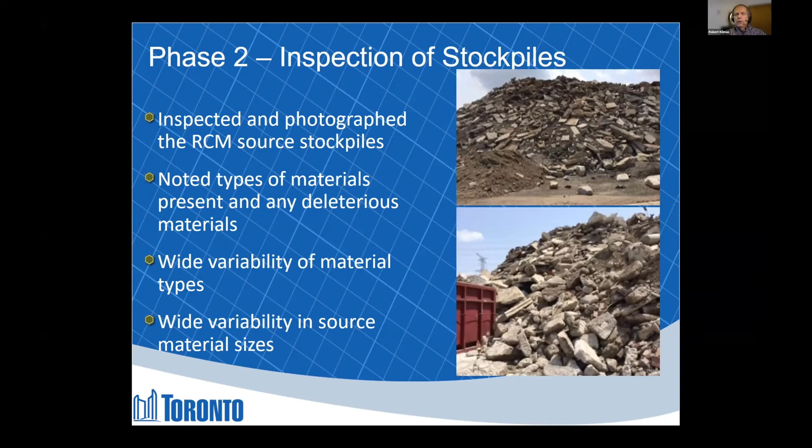We inspected the RCM that was produced. There were negligible amounts of any foreign material, any metal was removed, and there was a high angle of friction—so it was good material and good practices there.

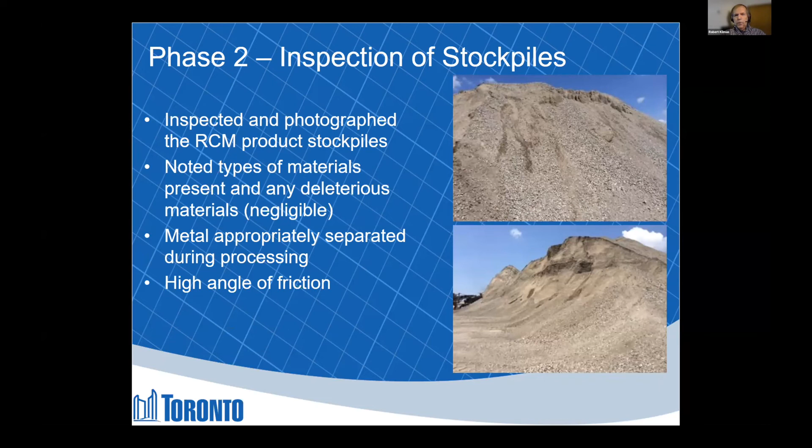We sampled the material according to MTO LS 625, where you take 3 bucket loads from a front end loader, mix it back and forth with a blade about 300 to 500 millimeters thick, and take a sample at 3 separate locations with an approved spade.

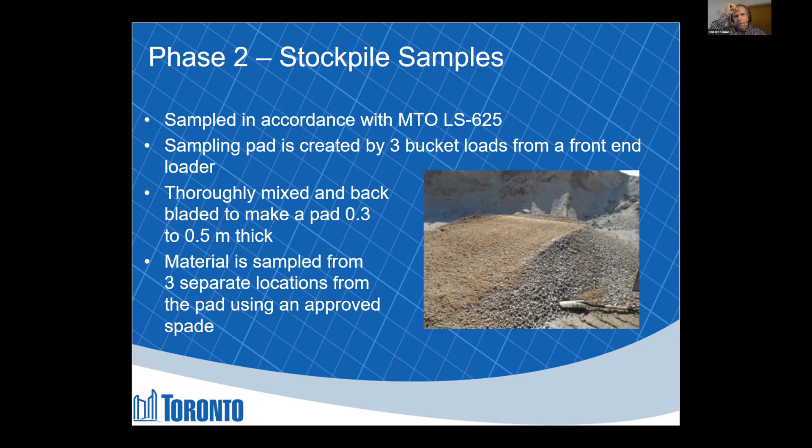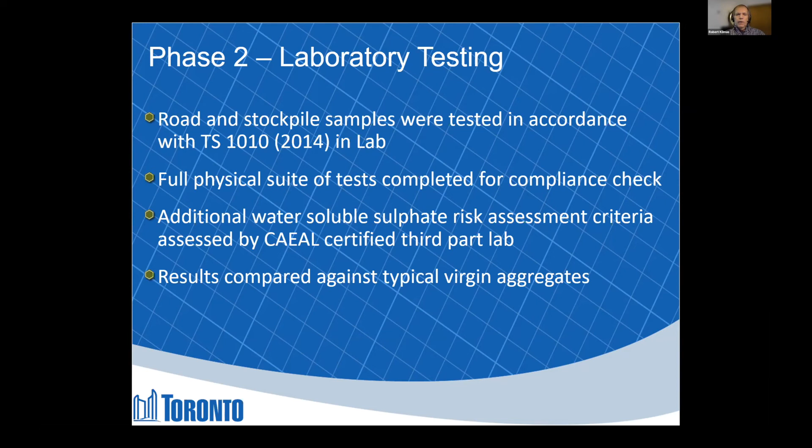We did some testing to see if they conform with TS 1010, and did a full physical suite of other chemical tests. I don't have the results on these slides, but they can be made available. We did a sulfate risk assessment and compared it against virgin aggregates.

What we found was that the stockpile material had a low risk of sulfates, which was good—they were keeping gypsum out. Results ranged from 720 to 1100 micrograms per gram. One test was kind of high, moderate risk, which showed the importance of controlling the stockpile.

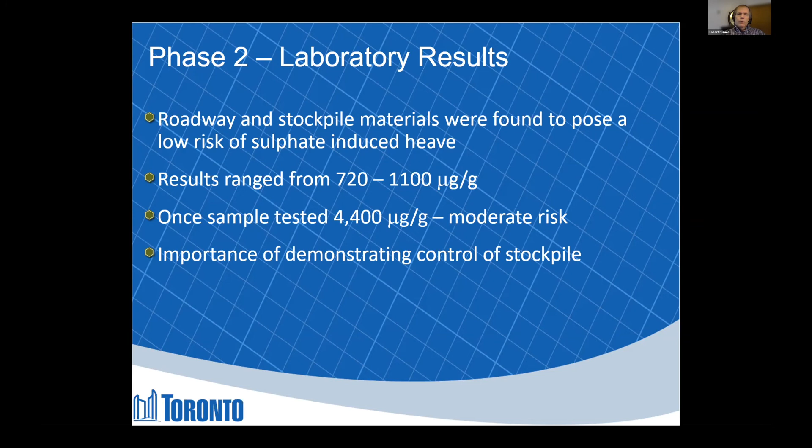Some concerns about using RCM in trenches as pipe bedding and trench backfill included: PHCs and PAHs present in RAP which could leach and damage rubber gaskets, tufa precipitates that could clog drains, and the pH of the leachate which could affect water resources and fish habitat.

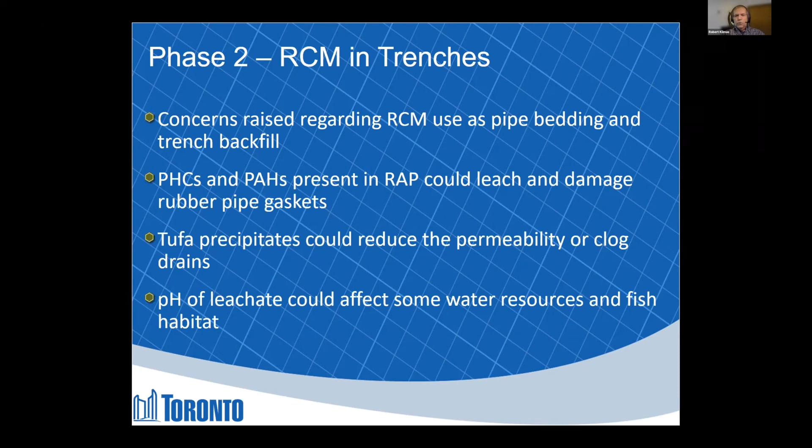What we found was the RAP was considered chemically stable, but to be safe we won't allow it in the trench bed—we'll allow it in the road base. So we added granular RCM to TS1010. We found TUFA was not an issue based on city research to date. pH still required some research, but showed the initial spike normalized after a few hours. RCM could also be corrosive to some metals like galvanized and aluminum piping—we don't use aluminum piping in our road network, but we could use galvanized for driveway culverts.

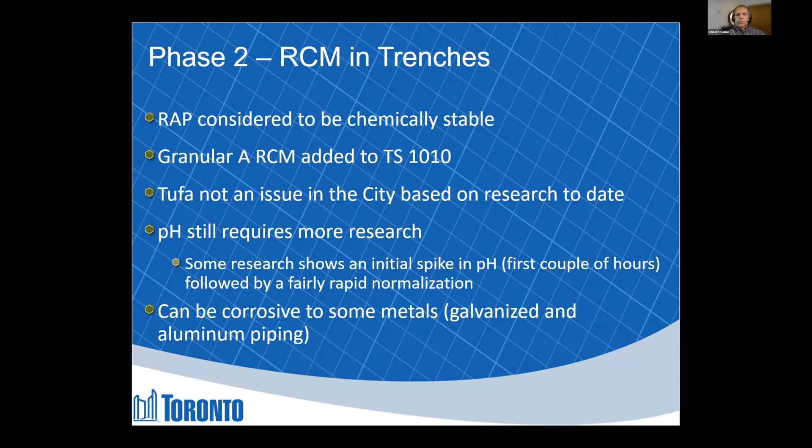One key thing was about a contractor supplying a QC plan. Key elements were controlling the source during delivery, detailing the process for removing deleterious material, and how gypsum and plaster are kept out.

Also for the QC plan, they must show how the physical properties were evaluated for sulfates, and we asked them to provide a written certificate stating that no building demolition waste has been used in production.

In conclusion, we found the RCM generally meets city specifications, with similar properties to virgin materials. The physical and mechanical properties observed varied, sometimes considerably, between projects. This confirmed the need for a contractor to have a quality control plan and the city to do quality assurance.

The last part of the project was to update our city standards. The main focus was that we were going to use RCM without RAP for pipe bedding and backfill. Aluminum and galvanized piping should not be used with RCM. We should do sulfate testing, begin requesting contractors to do quality control, and complete physical testing in accordance with our new spec TS1010.

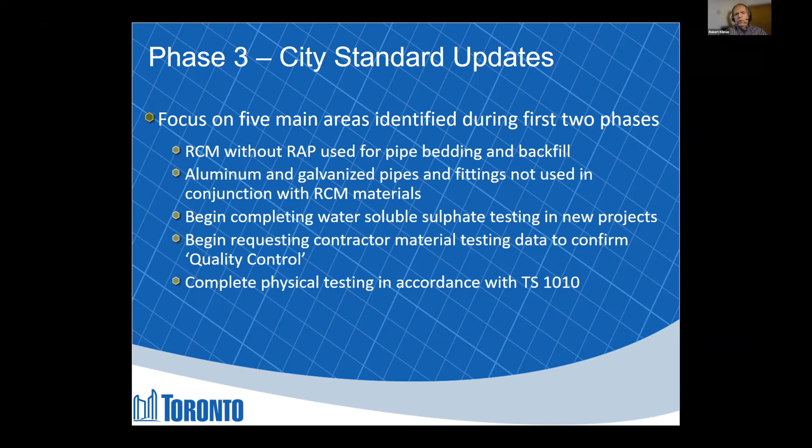We updated our TS1010. In the beginning it was just Granular A, meaning virgin material from the quarry. We changed it to Granular A Native, meaning quarried material, Granular A RCM which could be used for trench bedding material, Granular A RAP which could be used for road base, and 50 millimeter crushed aggregate. Our default for trenches and everything is Granular A RCM, so when we put that on our engineering profile drawings and go out to tender, that's the default.

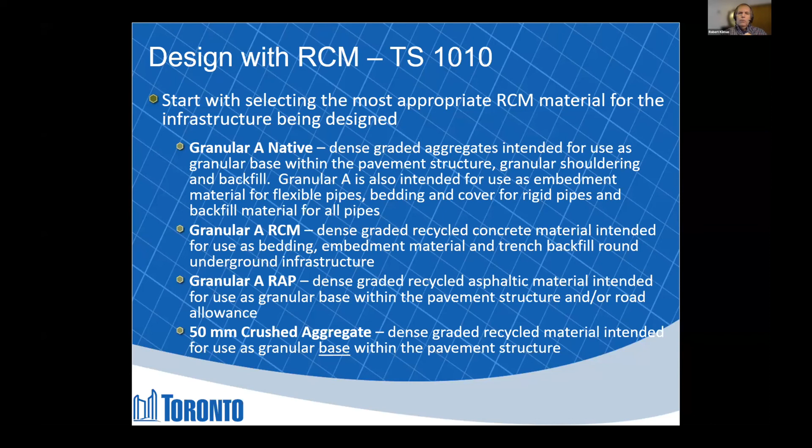And the Aggregate Recycling Ontario, they created a bunch of standards for producing quality aggregates, and they were kind of committed at the time to produce quality aggregates.

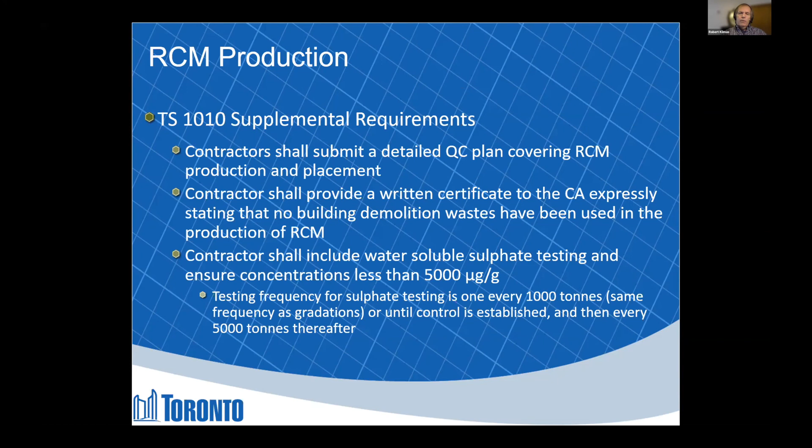And just to talk about that again, that's part of our acceptance. They have to submit the quality control plan and document how they're going to control that in their processes.

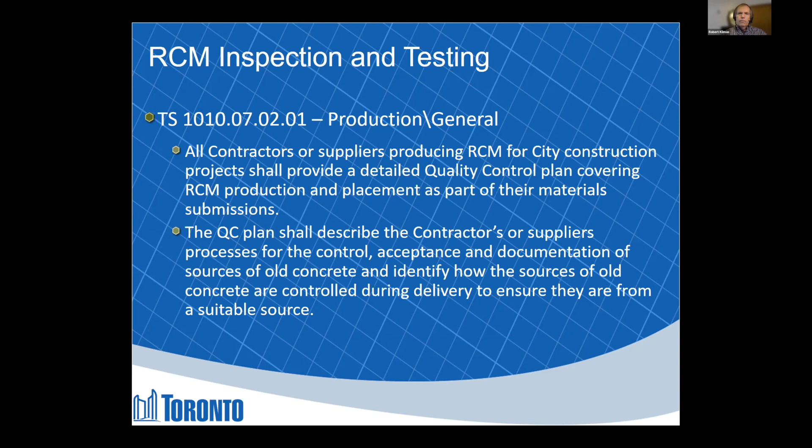And as a final point, we recommend a project startup visit to actually go to the site to confirm how they're doing it, confirm the designated stockpile is used, and ensure the trucks are properly loaded to reduce segregation issues.

Okay, thank you. Any questions?

Thank you, Rob, for the very good overview, and for getting into the detail there of how you managed everything from the phases and the testing to the quality control on the back end. There was a couple questions in the chat box about your quality assurance plan or program for the RCM. I think you touched on that. Anything else you might want to add?

Yeah, it's in our spec, so quality assurance. We do the testing, and the key thing was staff were afraid to use it before, but now we have something to go to the contractor and say, look, here it shows it's failed, take it out or don't bring any more. Five years ago we had nothing to defend ourselves to say this is poor quality or not, but now we do.

Perfect. Joanne, any other questions to bring forward?

Yeah, I'm starting to see the City of Toronto really leaning towards those outcomes-based kinds of specifications, putting the onus on the supplier to meet the quality control specifications. So was there much interplay—I know you probably put out these RFIs or set out the terms of these tenders—but is there a role that you play directly with procurement, or do they support this function as well?